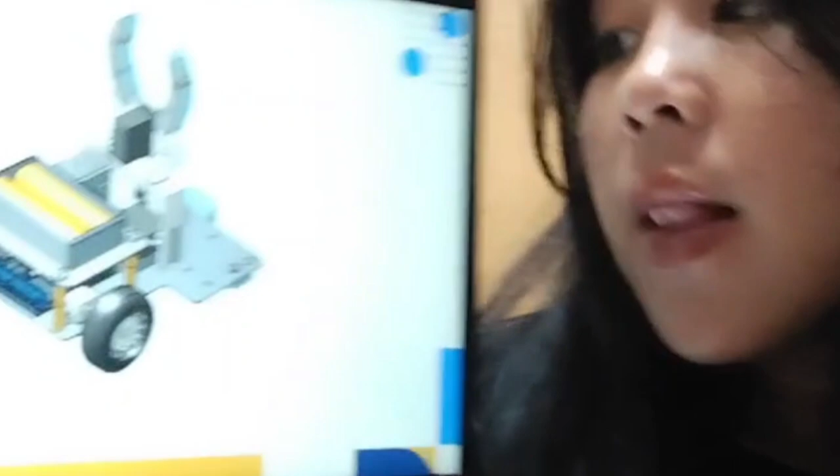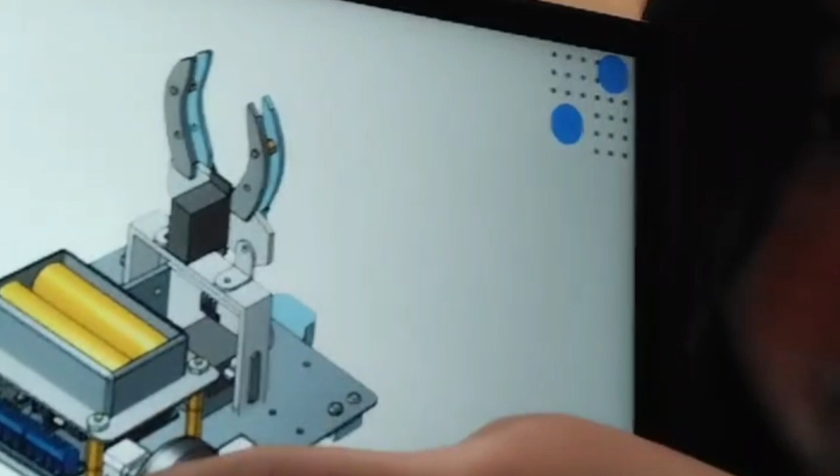In this design, I help in planning the placement of the robot body. The first one, motor wheels: we use N20 motor wheels, whose tires are smaller than the yellow wheels. Put them behind on the left and the right. The motor wheels are controlled by the DC motor, which is located right next to the motor wheel.

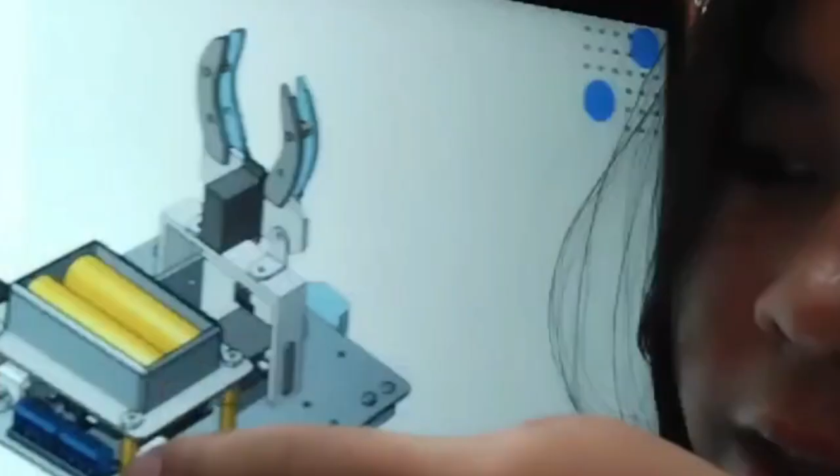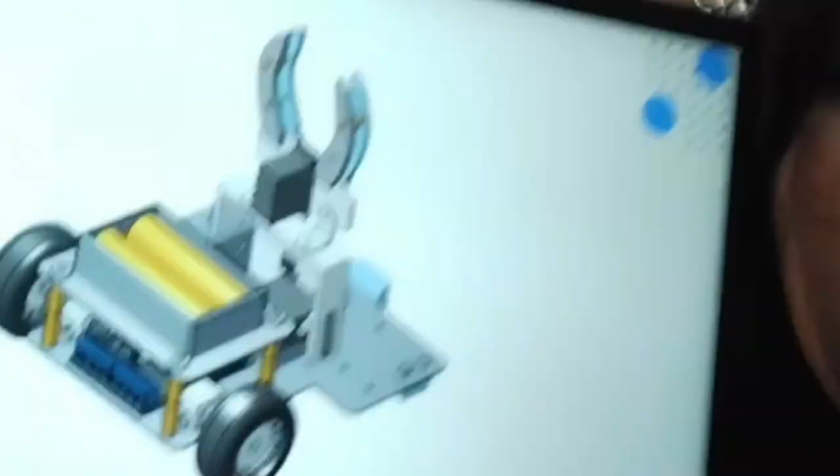And don't forget to protect the motor using the DC motor holder bracket disc. Next, spacer copper. This spacer copper, place 2 on the right side and 2 on the left side as a support above for the battery. Then the ultrasonic sensor we made in front, just below the gripper. Just below the gripper, it is used to detect the distance and the object in front of the gripper.

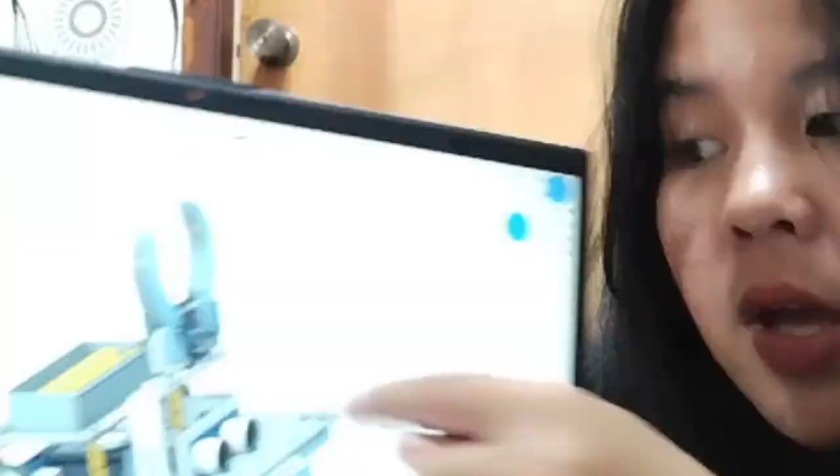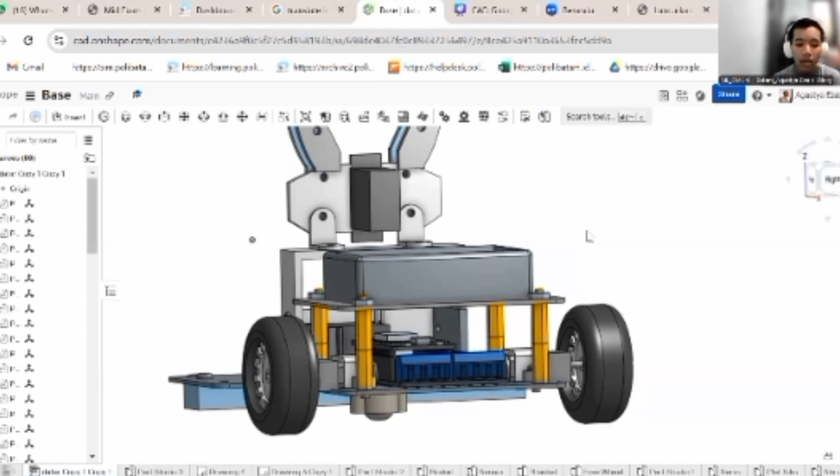My name is Agastya Ezaldiriski. I'm the leader of Group 3 PBL, and my job desk is electrical. I helped in determining the location of the components used for the line follower robot. The placement of components on a line follower robot is very important because it can affect balance, performance, and effectiveness in following the line. The following are the main components of a line follower robot along with an explanation of their placement and the reasons behind them.

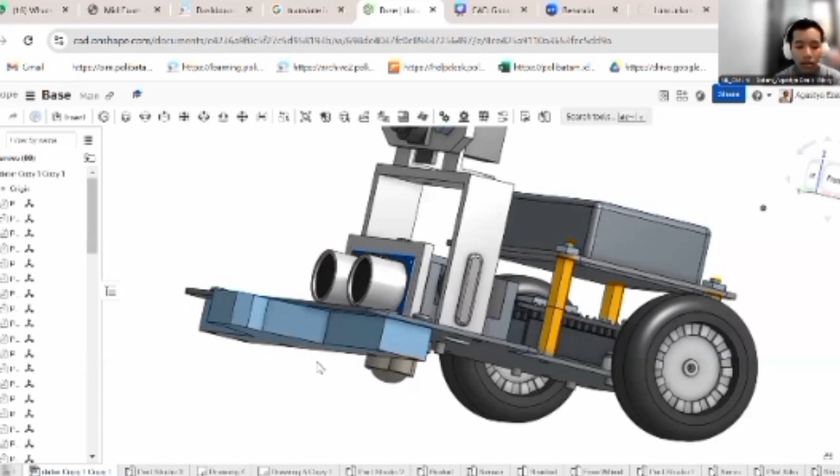The first, the line sensor. The line sensor is usually placed at the front of the robot and in a low position, so that it is close to the line to be followed. The line sensor needs to be placed as close as possible to the track surface in order to accurately detect changes in color or light intensity between our line and the area around it. Placing it at the front helps the sensor read the direction of the line that must be followed.

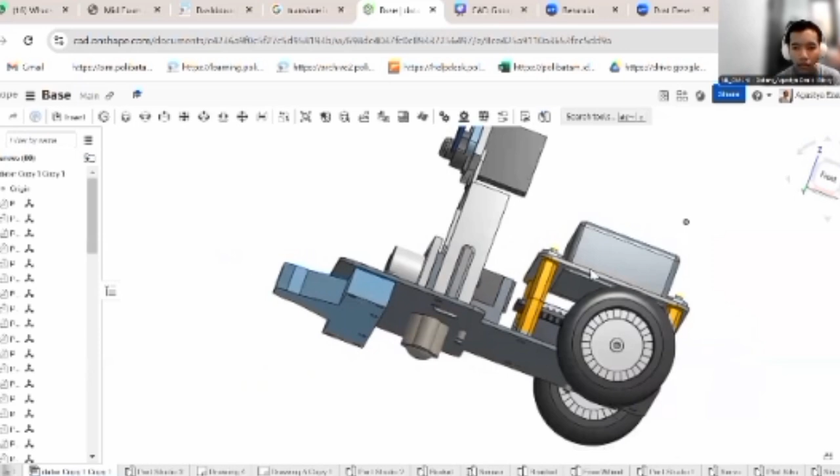And then the microcontroller we use is the ESP8266. It is placed below level 2 because it connects to other components such as the line sensor and motors, to make it easier to organize cables and connectors.

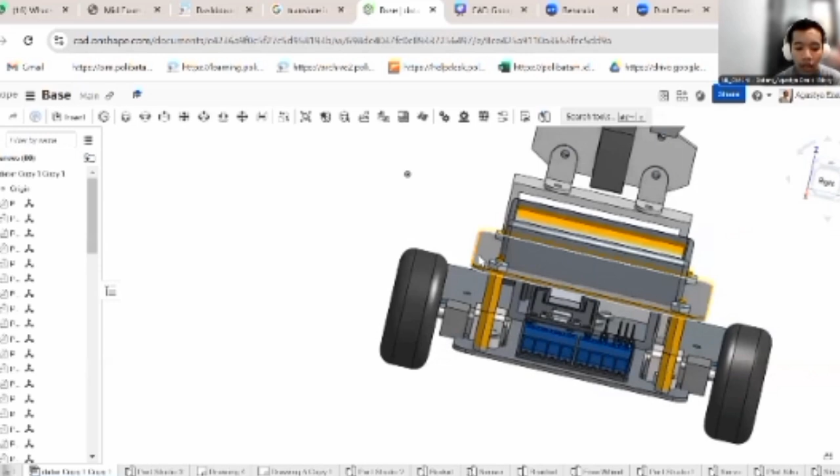Then wheels and drive motor. The drive motor and main wheels are usually installed at the back. By placing the motors and wheels at the back, the robot gets a stable push, which makes it easier to control the direction according to instructions from the line sensor. This position allows the robot to make sharper or smoother turns depending on maneuvering requirements.

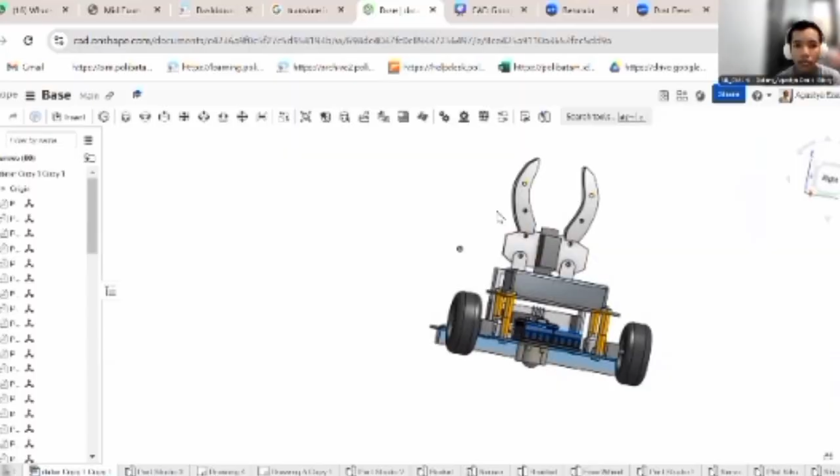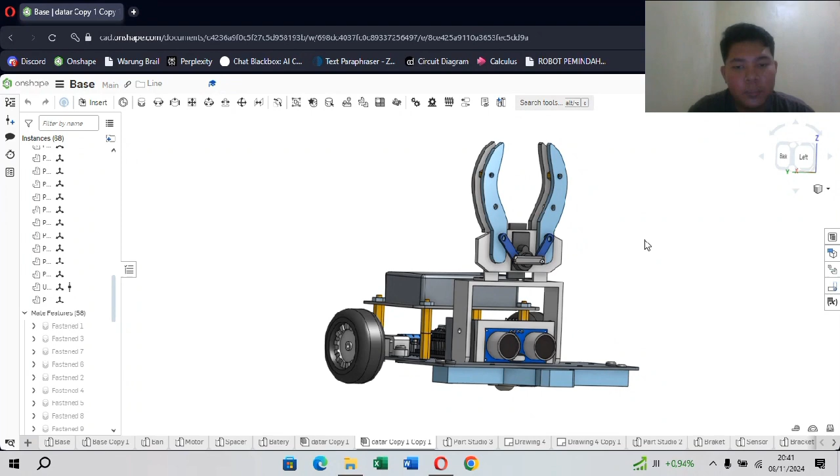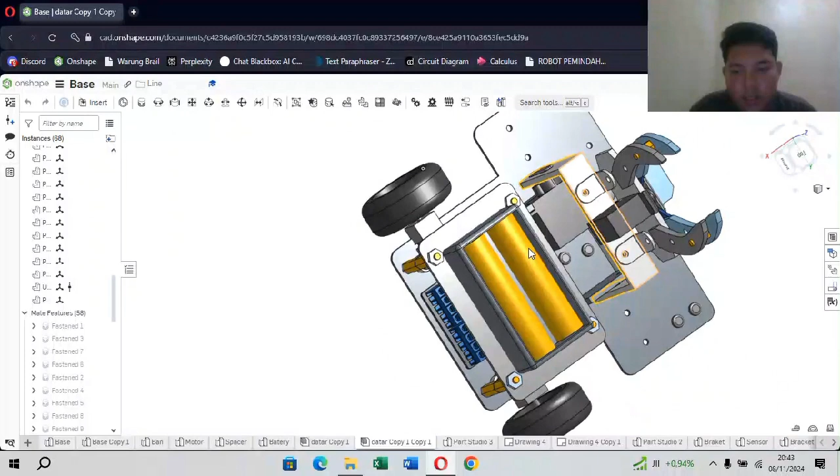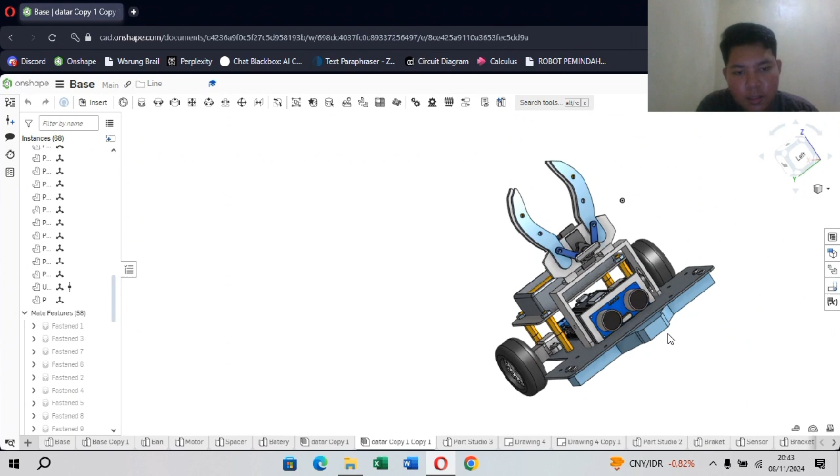Second, wheels. The wheels at the bottom indicate mobility, allowing the robot to navigate different areas. This will enable the robot to carry objects from one place to another. Third, battery pack. The visible battery pack suggests that the robot is designed to operate independently, likely without needing a continuous external power source. Fourth, sensor mount or bracket. There are additional components which may serve as a mount for a sensor or other attachment, allowing for possible adjustments such as obstacle detection or line following.

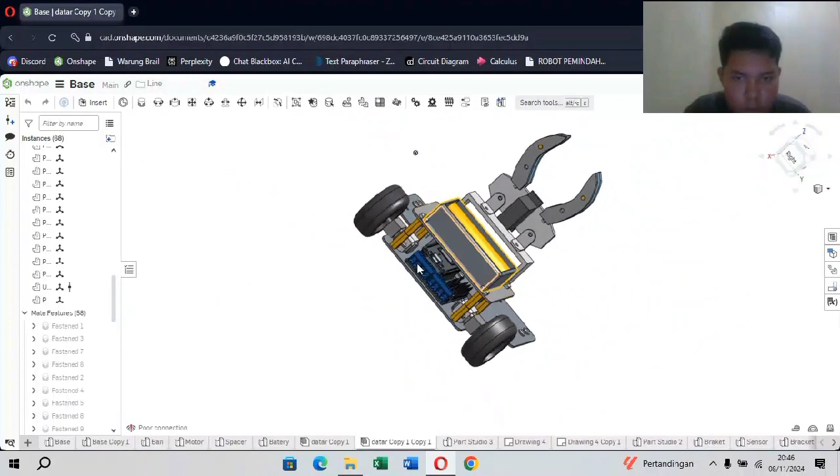Okay, next I will explain the CAD assembly of our robot parts. This copper spacer uses fastener assembly, and this DC motor bracket screw uses fastener assembly too, the wheels use revolute assembly, and the gripper uses revolute assembly. This screw in the line sensor uses fastener assembly, and this free wheel uses fastener assembly.

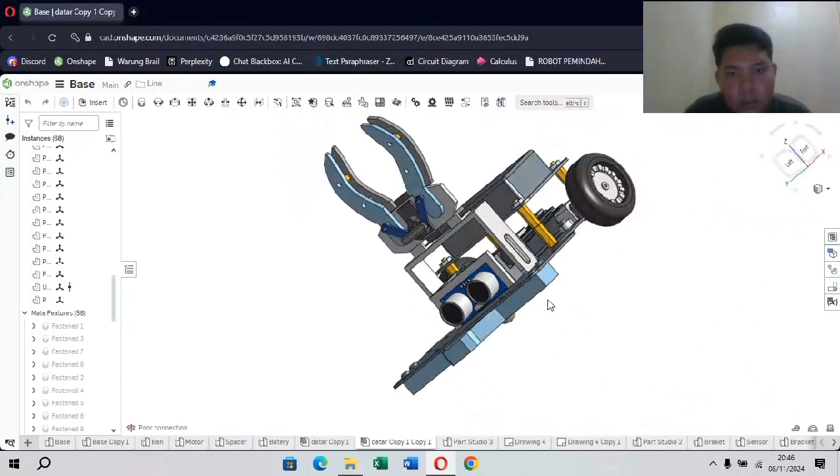I'm Horinsa Aulia Siva. I'm from Group 3. As a member, I will explain the bill of materials for our robot design. This explanation includes the description of components, the quantities needed, and the price of each component. Okay, the first one is BFD line sensor, 5 channel, 1 piece at 25,000. 2, ESP8266, 1 piece at 32,500. 3 is NodeMCU motor shield L293D, 1 piece at 20,000.

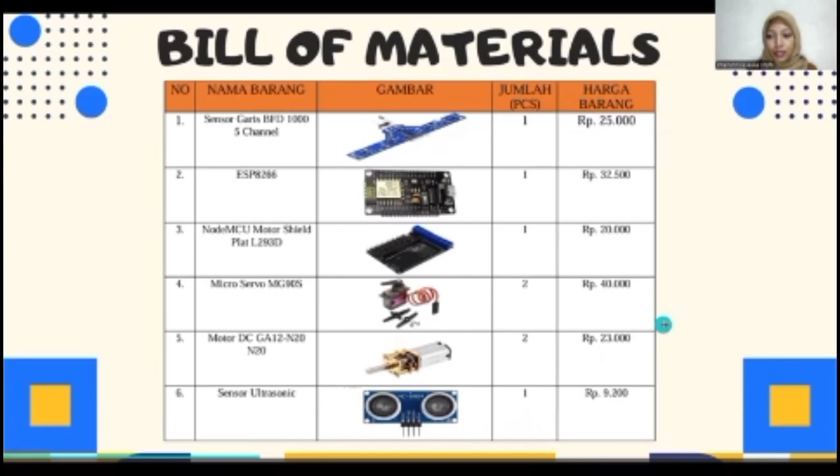4 is Micro Servo MG90S, 2 pieces at 40,000. 5 is motor DC GA12 N20, 2 pieces at 23,000. 6 is ultrasonic sensor, 1 piece at 9,200. The next component is N20 motor wheel, 2 pieces at 12,000. 8 is free wheel, 1 piece at 5,000. 9 is USB cable, 1 piece at 15,000. 10 is NCR battery 6,000 mAh, 1 piece at 7,500. 11 is battery holder for NCR, 1 piece at 3,200.

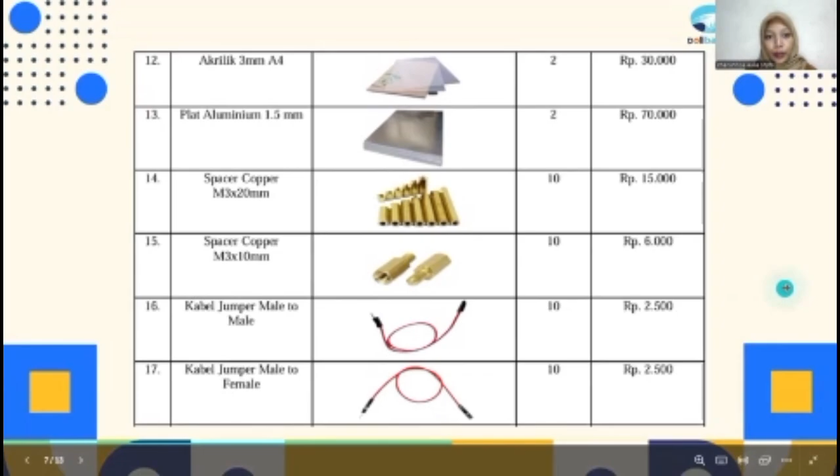And the next component is acrylic, 2 pieces at 30,000. Next is aluminum plate, 2 pieces at 70,000. Next is spacer copper M3 by 20mm, 10 pieces at 15,000. Next is spacer copper M3 by 10mm, 10 pieces at 6,000. Next is male to male jumper wires, 10 pieces at 2,500. Next is male to female jumper wires, 10 pieces at 2,500. And the next component, female to female jumper wires, 10 pieces at 2,500.

Next, bolt M2 by 16, 5 pieces at 4,000. Next is bolt M3 by 20, 4 pieces at 4,000. Next is nut M3, 4 pieces at 800. And the last, nut M2, 4 pieces at 4,000. And the total for all components is 353,700 rupiah.

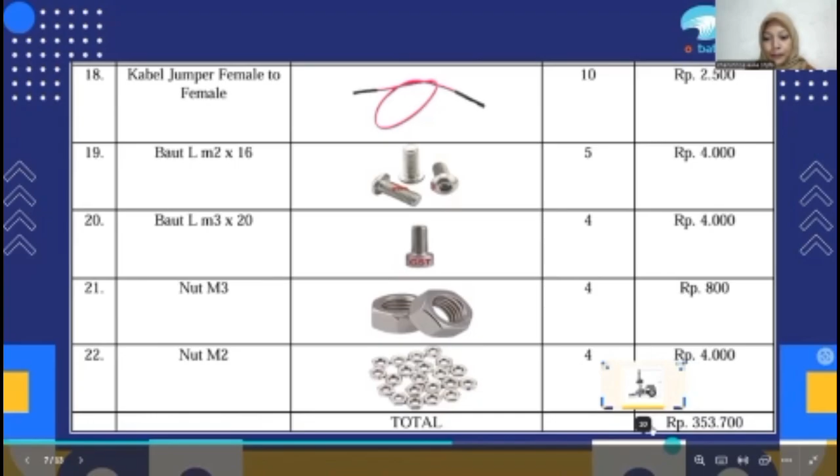As a member of Group 3, I have been involved in selecting the appropriate components for this project. Additionally, I have assisted in the placement of components, such as positioning the battery on the second level of the robot like this. We chose this battery because it provides more power compared to other batteries available in the store. And next, the ESP microcontroller is placed on the first level to facilitate its connection to other components like the DC motor, ultrasonic sensor, line sensor, or other components which only operate when connected to the ESP, like this. Thank you.